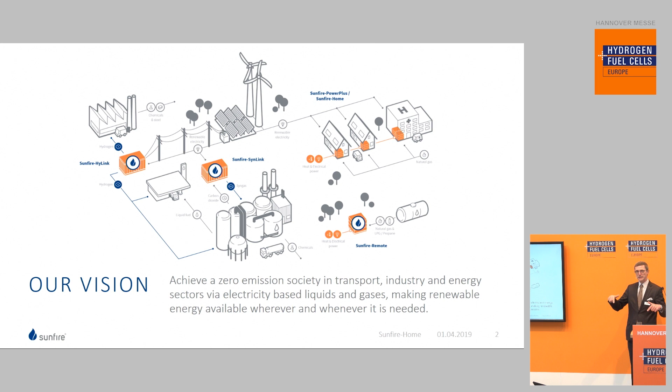So we have electrolyzers converting renewable energy and steam into hydrogen, or with the co-electrolyzer into syngas, and finally into synthetic fuels. What's interesting for us is that this part of the business brings us volume for the repeating parts of the fuel cell, bringing cost benefits into this sector of the business.

And last comment to this landscape: our vision is to provide renewable energy in the form and at the time and in the volume where it is needed. Form means it could be molecules, could be synthetic fuels, could be hydrogen, and then we would spread out to the final applications.

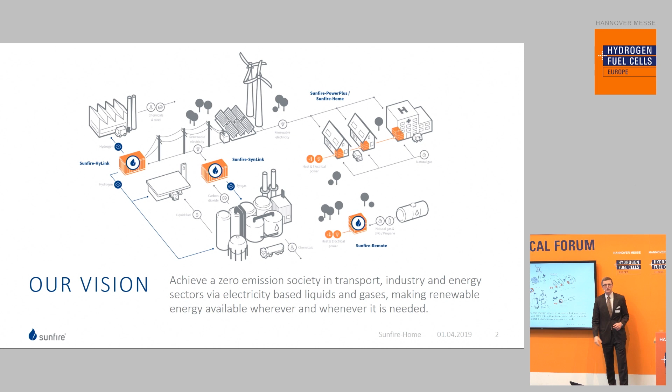Also a benefit towards the home solution, the residential fuel cell solutions, comes from our experience in remote areas. We have fuel cells in Siberia along the gas pipeline based on natural gas. We have remote fuel cells based on propane, butane, liquid fuels, or liquid gas, and we could benefit from that for the unit we are talking about today.

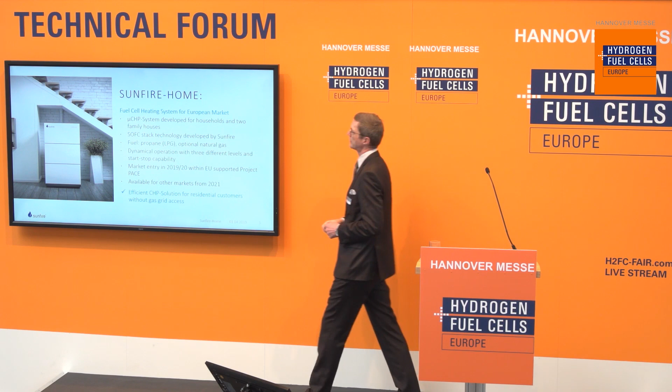And this is the picture of the unit, the residential fuel cell, and with such we could leverage the SOFC technology towards single-family houses, converting either natural gas into power and heat, or LPG.

And why LPG? Why are we starting with this segment of the market? Because there's no solution available. So if you have a heating system based on oil, because there's no gas grid, no natural gas grid, then you don't have so many sustainable alternatives you could go for if you want to modernize your heating system, or if you are looking for a sustainable, emission-free solution.

And with our fuel cell, you have this in hand. So you could go for a tank with LPG, the usual camping gas, I would say, like you could buy in every market, and then you could feed the fuel cell on site, providing power and heat to your home.

So these families now have a solution available to have a sustainable delivery of power and heat for the flat or for the house.

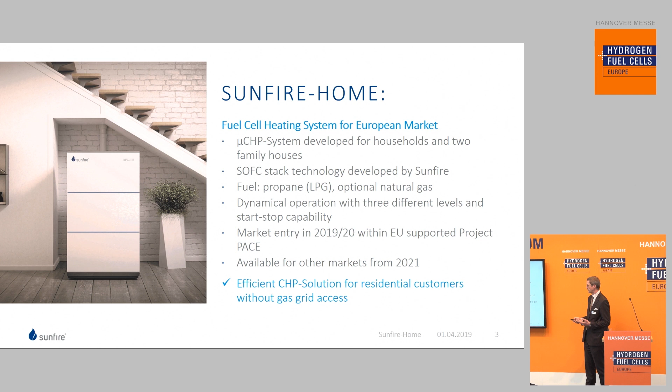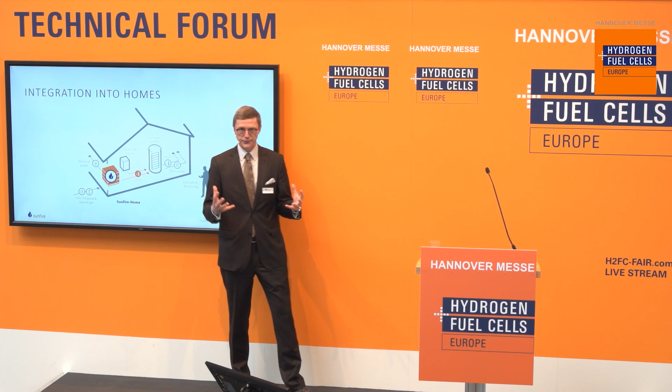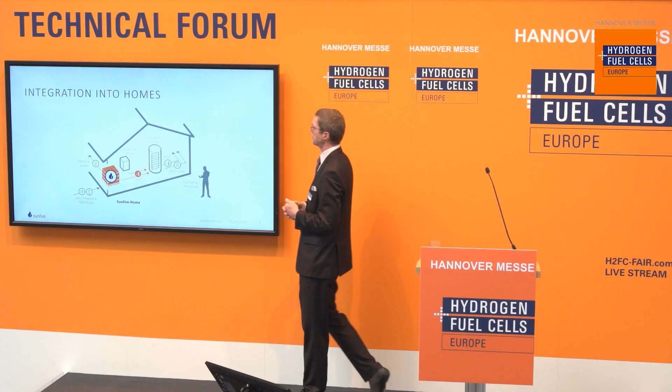The method we are working with is a single unit, and you can see that at our booth, which is D46 in this direction. The single unit, the pure fuel cell, and then you could combine that with an existing heating system or a new one, which means there are several providers of peak boilers, peak burners, and the peak load boiler would provide additional heating if needed, with both units delivering heat towards the heat storage.

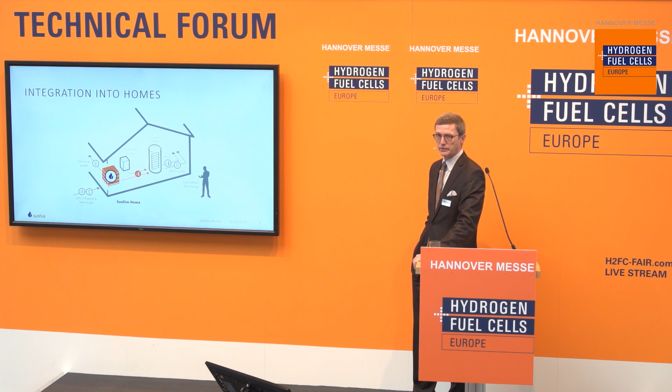And out of the heat storage, you could take out the usual things you need, which mostly are warm water and the water for the heating system in the house. So this is the combination, and this means also that you could add such a fuel cell to an existing heating system in the house. And in addition to that, of course, you would provide the power to the existing infrastructure.

It could also be that you have a battery in addition to that, which brings you in a position that you could also store energy between the consumption and the production by the fuel cell.

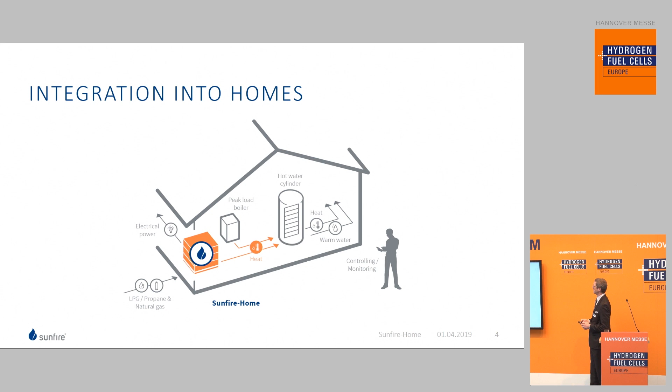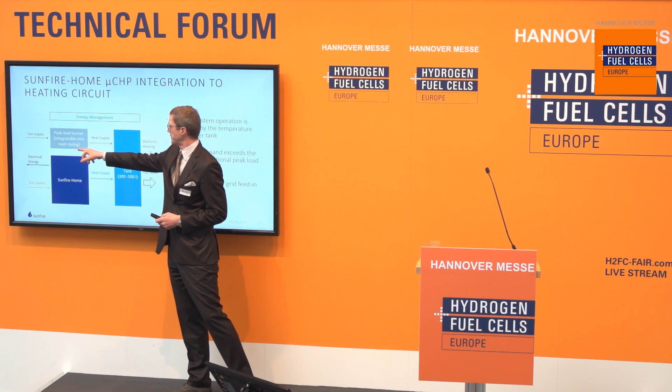Diving into the details, just to explain that again, we have the peak load burner. It's a traditional heating system. It could be smaller sized than if you have this alone. And then you have the fuel cell, and this is a combination. Out of that combined system, you have the water and the heat. That should only give you an idea about that in addition. That's energy management above that.

Take care for the right balance between the operation of both systems to leverage the efficiency of the fuel cell as much as possible. Having said that...

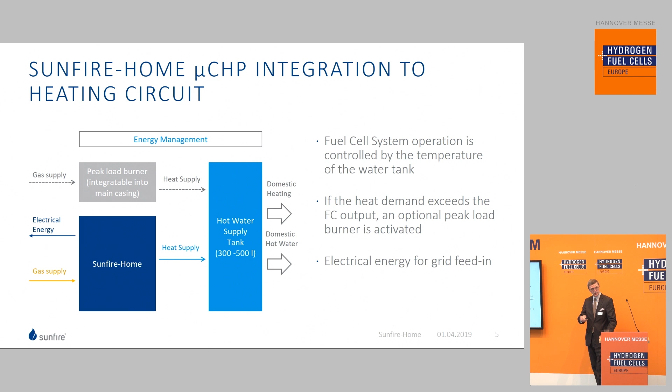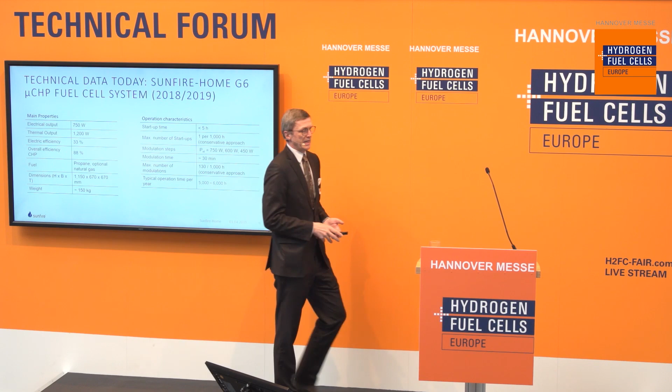Once I'm able to change, I come to the numbers to show you the details. We have 750 watts out of the fuel cell. It sounds low at first when thinking about a fridge, an oven, cooking equipment, or a washing machine, but on average this is truly enough for a single family house. In addition, it's 1.2 kilowatt thermal power, and both combined you would reach almost 90% total efficiency.

You could choose between propane and natural gas, depending on your infrastructure.

What else should I say? Typically, we would operate that between 5,000 and 6,000 hours per year. It depends on the consumption of your household. And during the summertime, there's mostly a time when you would switch off the unit and not heat your house.

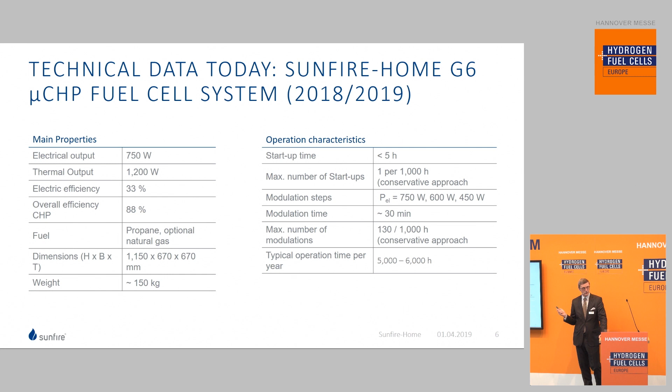The fuel cell will be based on... what should I do? Thank you for that.

The fuel cell sizing is based on the normal consumption of a single family house, and here you see an example of a German household. It's based on investigation of Roland Berger, and it's still true. The reason I show you this figure is to tell you about the reduction of primary energy consumption based on the efficiency of the fuel cell, and this brings sustainability to the whole case.

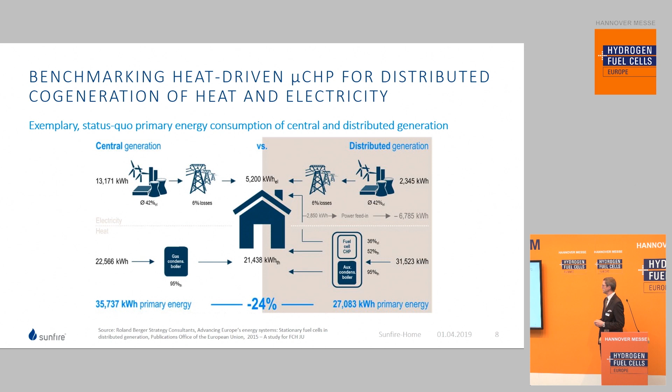Next slide, please. We are able to provide such solutions to the market based on our experience of 10 years working in the field of electrolyzer and fuel cell. We are 130 people doing that. On the right-hand side, you see several international recognitions of our experience and knowledge.

We are really proud to be 5 years in a row amongst the Clean Tech 100 companies. On the left-hand side, you see interesting investors, including 2 utilities, and this is also a driver of the fuel cell business for single-family houses.

The great support of the joint undertaking, the fuel cell hydrogen joint undertaking, so the EU support within the program PACE, gives us a chance to provide the fuel cell system for a price which is comparable with existing heating systems, traditional heating systems, and that's great.

We will start manufacturing in Q4 of this year, having the pilot units available by early summer, and then we could provide up to 500 units supported by the EU by the end of this year and early next year for the market.

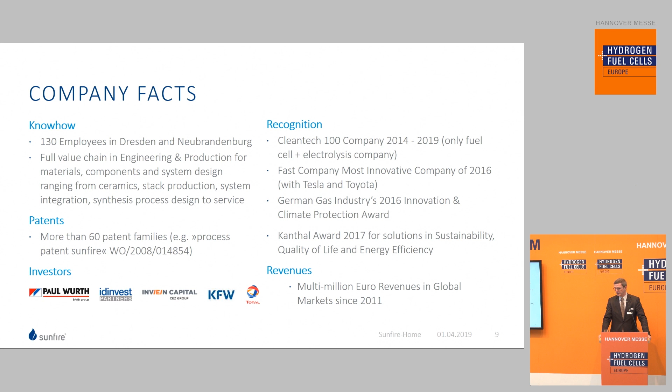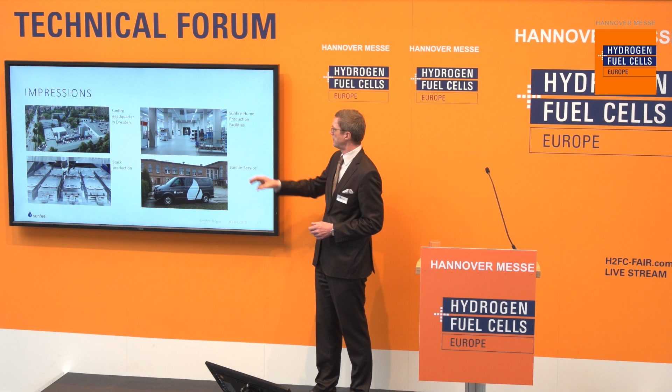This should give you some impressions about the company. This is our facility in Dresden. Here you see the stacks, where we are producing them. And this is in Neubrandenburg, the manufacturing site, to give you an impression of that. We could combine the previously developed solutions of Vaillant, the heat equipment supplier in Germany.

We have the 6th generation right now, combining that with the knowledge of new enerday from Neubrandenburg, with very small LPG-based systems, and our long-lasting experience with electrolyzers and fuel cells as well. This brings everything together for the units which we call Sunfire-Home.

Next slide. So I want to thank you for your attention, and I'm now ready for your questions.